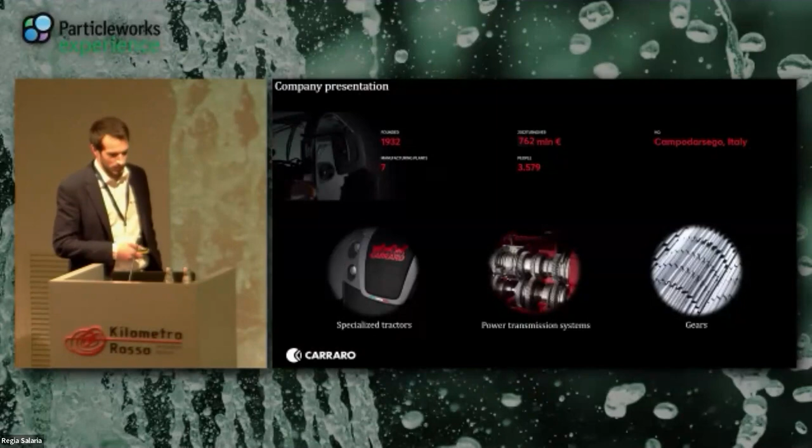First of all, introduction of the company. Carraro Group is a leader in production of specialized tractors, gears, as well as power transmission systems for agricultural and construction equipment applications, as well as automotive industries and material handling. The headquarters of the group is in Campodarsego, near Padua, and the group counts over 3,500 employees, across our manufacturing plants in Argentina, Italy, India, and China.

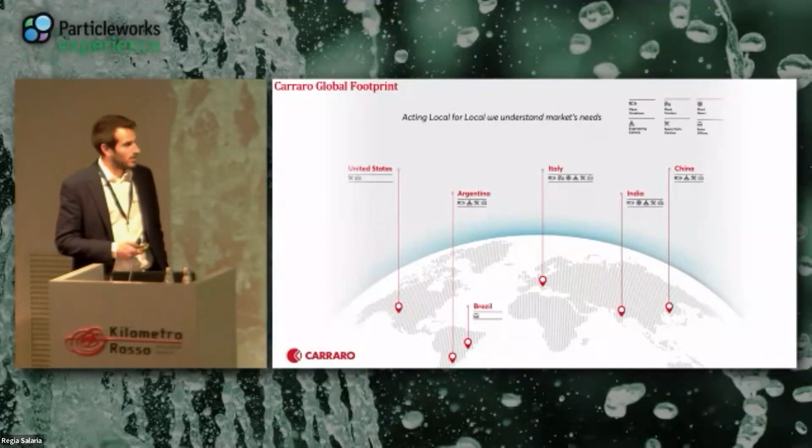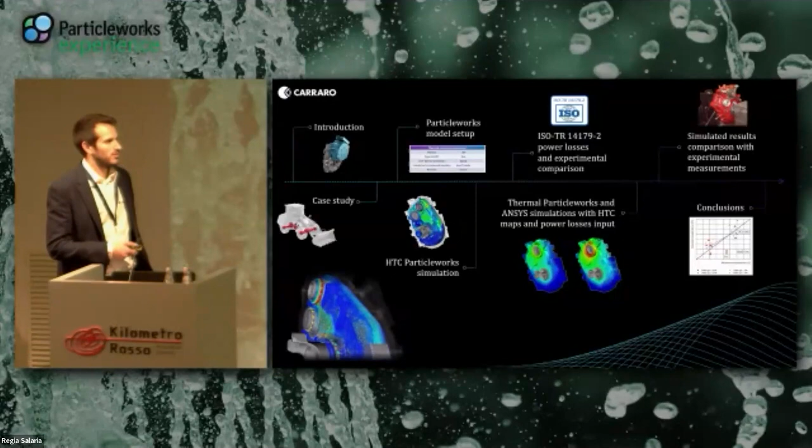After a brief introduction and an explanation of the case study, we will see the Particleworks model setup and simulation for estimating the heat transfer coefficient of the transfer box under investigation, and we will see the power losses formulation in accordance with the technical report of ISO 14179 part 2. And we will see how these two contributions have been used for the thermal steady state Particleworks and ANSYS workbench simulation. Finally, we will see a comparison of the results with the experimental measurements.

As we know, also in off-highway power transmission system field, electrification is becoming more and more a relevant topic because of the strengthening of emission regulations and the need for less fuel consumption. This leads to the typical use of high rotational speeds of the e-motors that causes an increase of power losses and temperatures. These two aspects have to be controlled, as temperatures can lead to possible overheating of the internal components, and power losses must be controlled in order to maximize the efficiency of the transmissions.

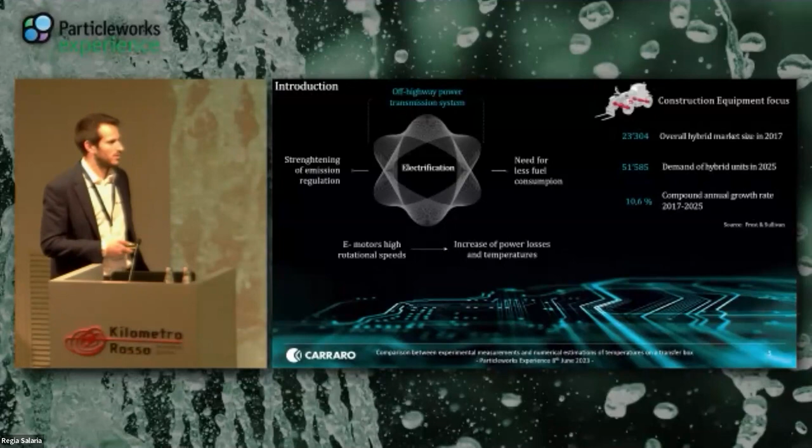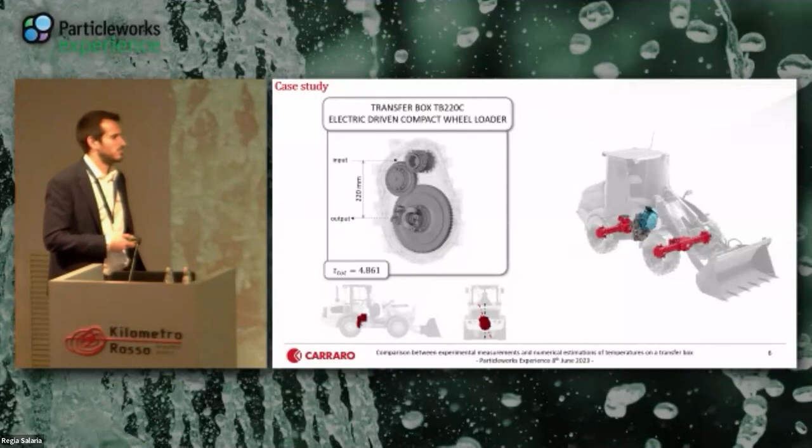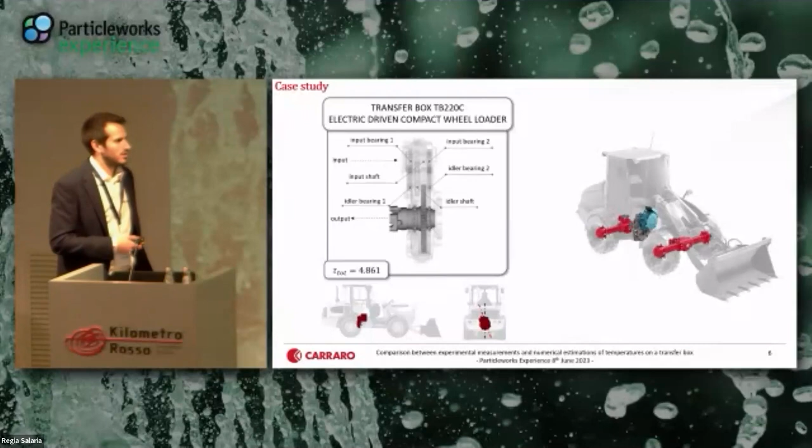The case study under investigation is a transfer box for an electric compact wheel loader. The total ratio of the transfer box is about 4.86, and it is characterized by an input-output axis, with an overall axis distance of 220 millimeters. The transfer box is composed of an input shaft, an idler shaft, and an output shaft, each of which is supported by two ball bearings.

The aim of the analysis is to investigate the influences of two different input speeds of the input shaft, as well as two different input rotational directions, clockwise and counterclockwise, in terms of overall HTC (heat transfer coefficient), as well as churning losses, and then temperatures.

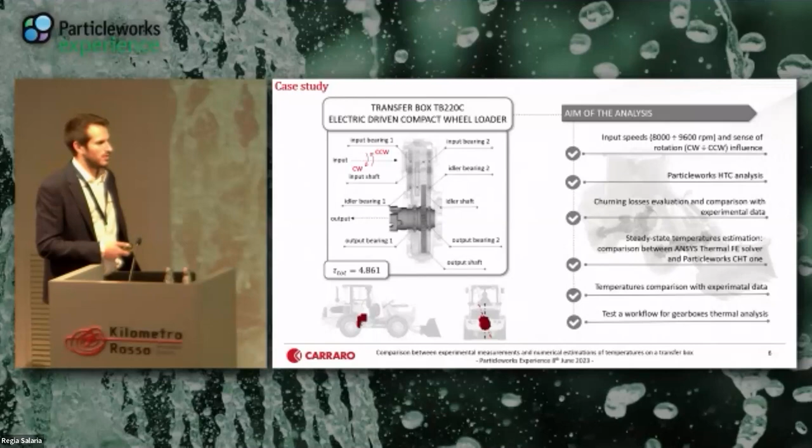Overall, the aim of this workflow is to validate this type of analysis for gearbox thermal analysis, and so the temperatures are being compared with the experimental results.

Regarding the model setup, we used 0.8 particle size, which leads to a total particle count higher than 2,300,000. The simulation for the HTC and conjugate heat transfer analysis has been performed on a workstation with a GPU NVIDIA RTX A5000.

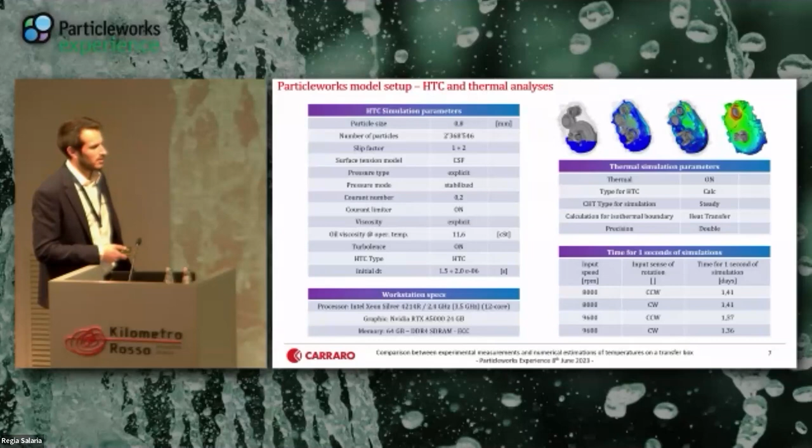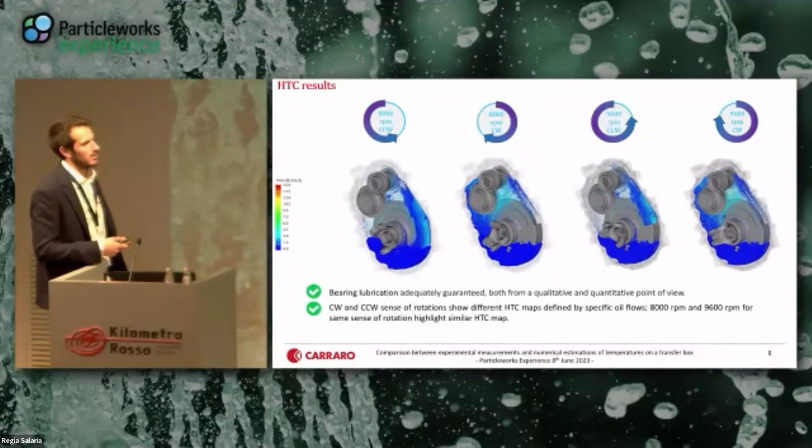The results of the heat transfer coefficient analysis show that, first of all, bearing lubrication is guaranteed in all conditions. Considering the same input speed of 8000 RPM at the input shaft, we can see that the different rotation directions, counterclockwise and clockwise, lead to a different distribution of oil inside the transmission, both for lower idler and for the higher idler. This oil distribution leads to an HTC map on the internal surfaces of the housing that is different for the counterclockwise and clockwise rotation cases.

This is for the frontal view of the transmission, and this for the rear view. The results are similar to the front view.

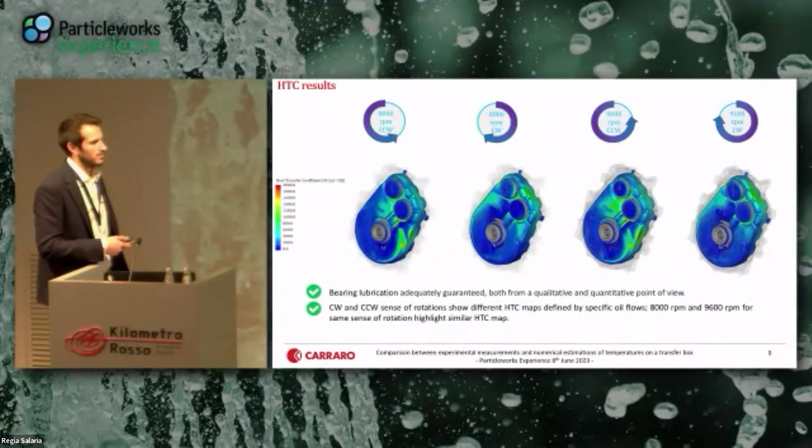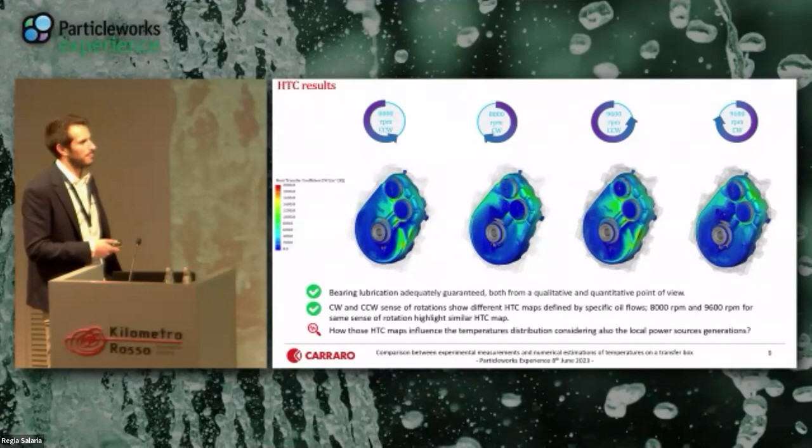Now the question is how those HTC maps influence the temperature on the gearbox, considering that we have different power source generation due to bearings, seals, and churning losses of the gears.

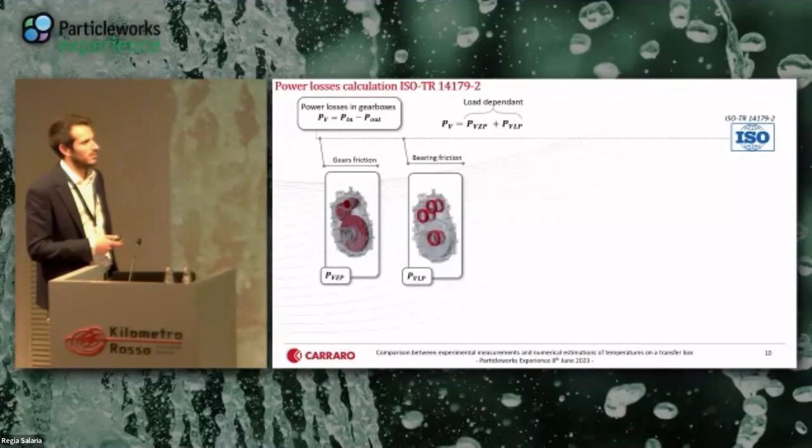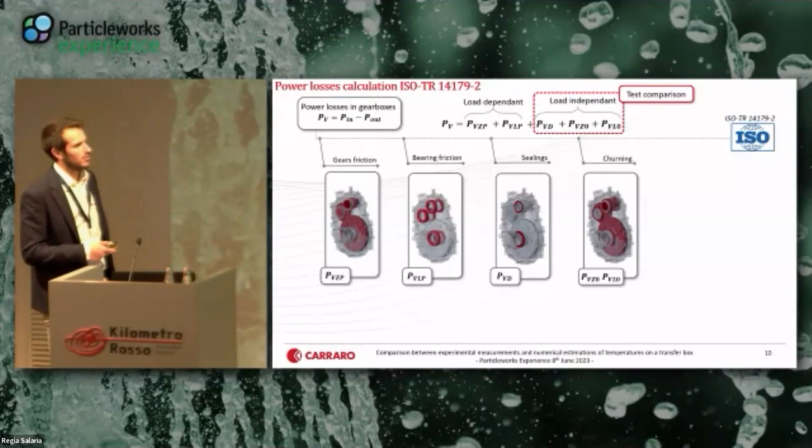We estimate the power sources, these power losses that serve as the power sources of the thermal analysis, according to the formulation provided by the technical report of ISO 14179 Part 2. Power losses are, in few words, the difference between the input and output powers, and are defined by different contributions. The first contribution is the friction of gears and the friction in bearings, and these two contributions are clearly load dependent. Then there is a contribution of sealings, and a contribution of the churning losses of both gears and bearings due to oil splashing, which are the contributions for the load independent conditions, and those contributions have been compared with the experimental test. And then there are other contributions.

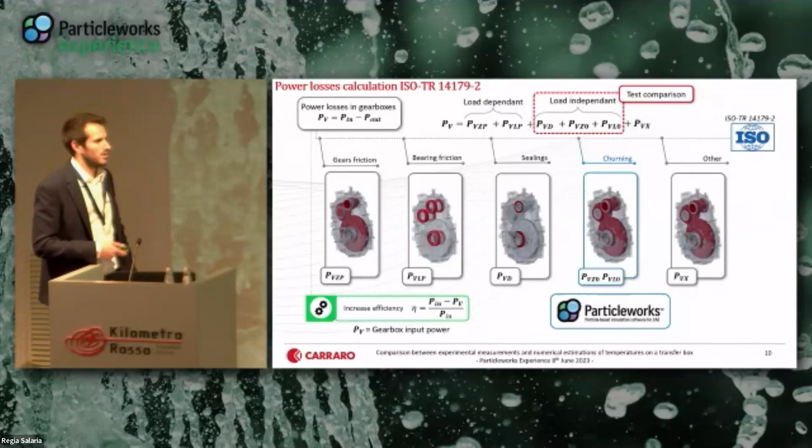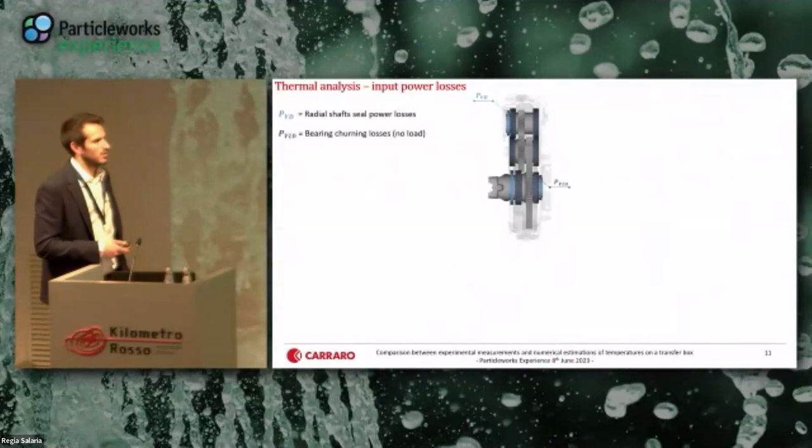We have to keep in mind that our aim is to minimize the power losses, and so increase as much as possible the overall efficiency of the transmission. With this goal, Particleworks can help by analyzing the churning losses on bearings and gears. For our application, we have 3 different shaft seal power losses at the input shaft, and 2 at the output shaft. We have the contribution of the bearing churning losses for the 6 bearings, and then we have the churning losses contribution for the gears.

It is worth noting that the technical report formulation does not take into account the different contributions, such as the sense of rotation of the gears, the presence of a carter or cover to protect the gear from oil splashing. It also does not take into account the contribute of the gears above the oil level, such as the idle and input gear, and for this reason it does not account for oil temperature.

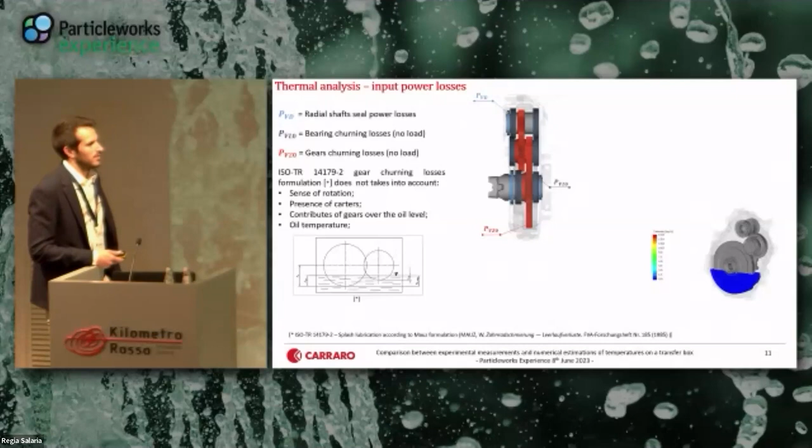And so we use the previous HTC simulations to estimate the churning losses, the overall churning losses of each case study.

And we see that, as we know, first of all, the presence of carter and screen has a great influence on the churning losses, because the output gear has the higher contribution to the overall churning losses, but is quite protected from the oil splashing.

Then we can see that the idle and input gear also contribute to the overall churning losses. For this fact, we use the different percentages of these churning losses to split the estimation given by the technical report to the different gears.

We also applied this power source not to the entire shaft, but only to the outer portion of the gears, as that is the portion of the gear in contact with oil.

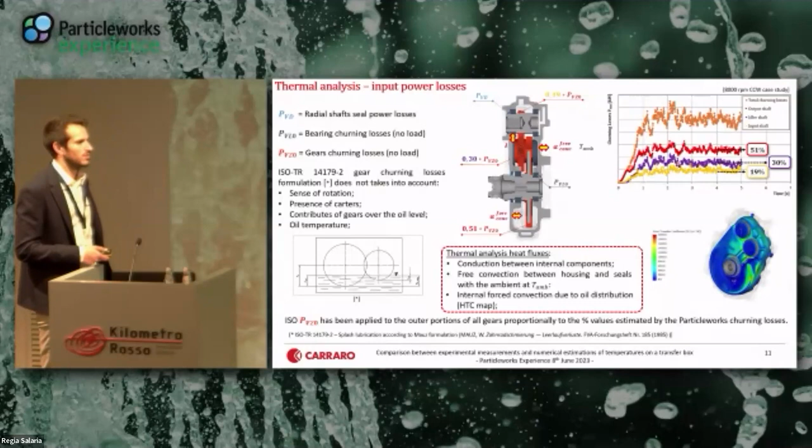The thermal analysis heat fluxes considered during the thermal simulation are the heat conduction between internal components, the free convection between the housing and the seals with the ambient, and the internal forced convection due to the oil distribution, which is the HTC map.

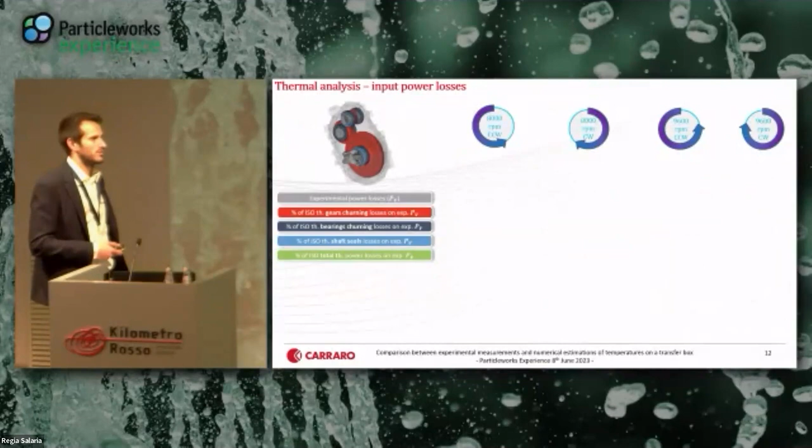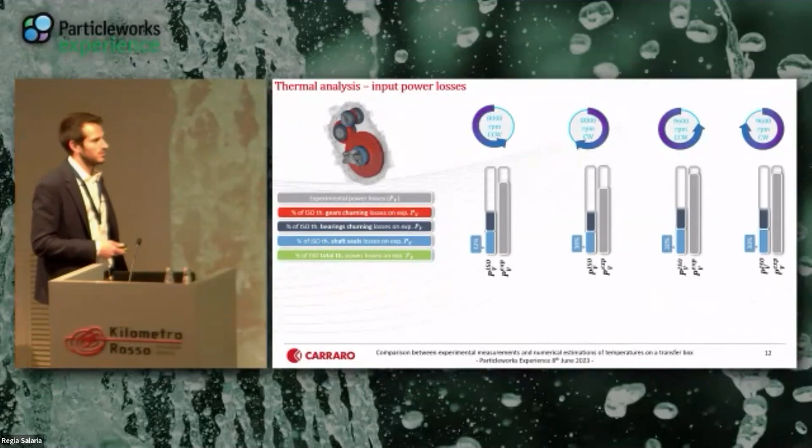Before going ahead, we compare the experimental power losses with the ISO theoretical power losses for the no-load case, and we saw that the different contributions lead to a certain gap with the experimental value.

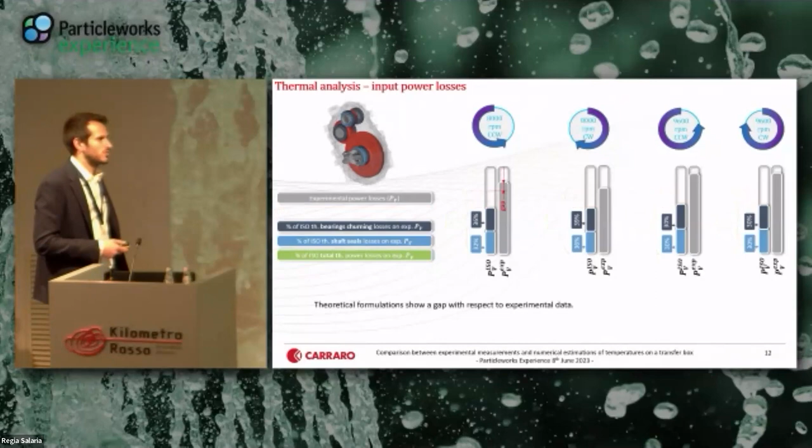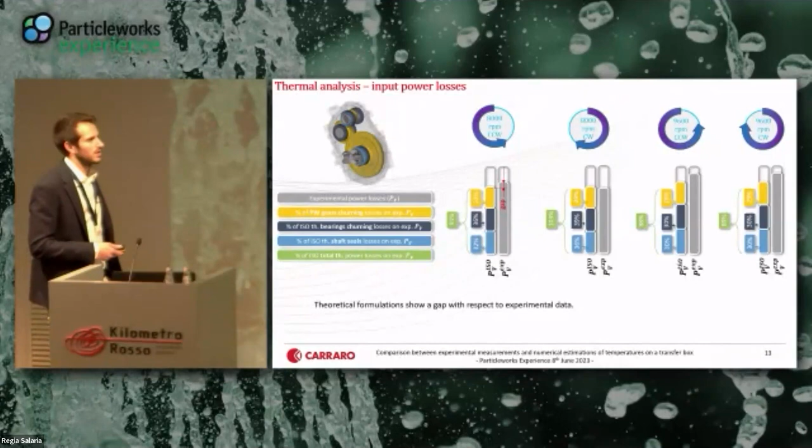We tried to substitute the churning losses calculated by ISO with the churning losses provided by Particleworks, and we see that this gap can be reduced for all cases.

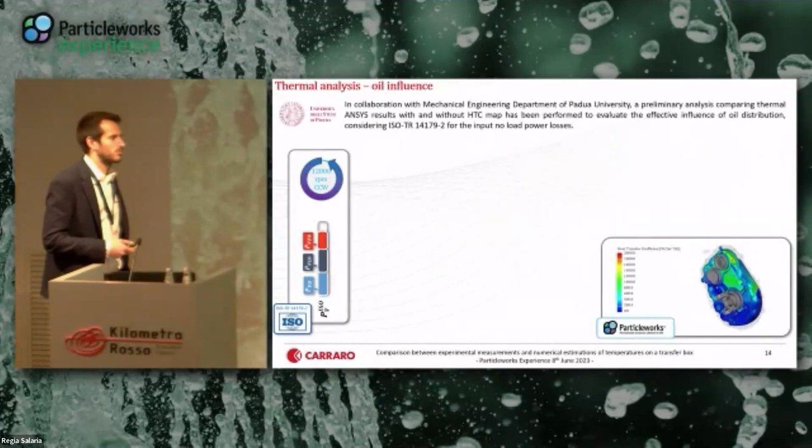For the thermal analysis, we proceed step by step. First of all, we start with a project in collaboration with the Mechanical Engineering Department of Padua University, analyzing two different simulations using ANSYS Workbench as a thermal FE solver.

In the first simulation, we consider only the power losses given by ISO for this case study. In the second simulation, we consider, in addition to these power losses, the HTC map given by Particleworks.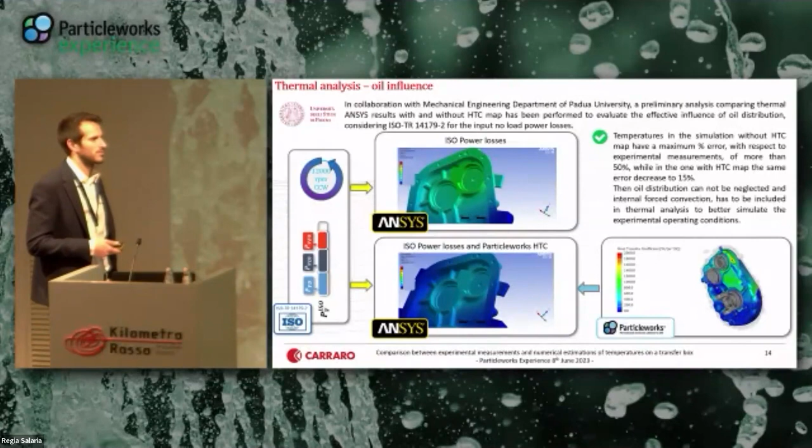We see that the percentage error given by the two simulations is quite different. In the case with the HTC map, we have a maximum error of 15%, with respect to the other case which was 50%. So we can say that the HTC map cannot be neglected in this kind of thermal analysis in order to better approximate the experimental values.

We see that with the thermal analysis, the CHT analysis in Particleworks, the temperature distribution inside the transmission is in accordance with the input power losses in bearings, the external portion of the gear, and the input seal, for example.

But the most important result is that the different HTC maps for the counterclockwise and clockwise input rotations at the same speed lead to two different temperature distributions. In particular, we see that the clockwise case study has a higher temperature than the counterclockwise simulation, in accordance with what we found in experimental tests.

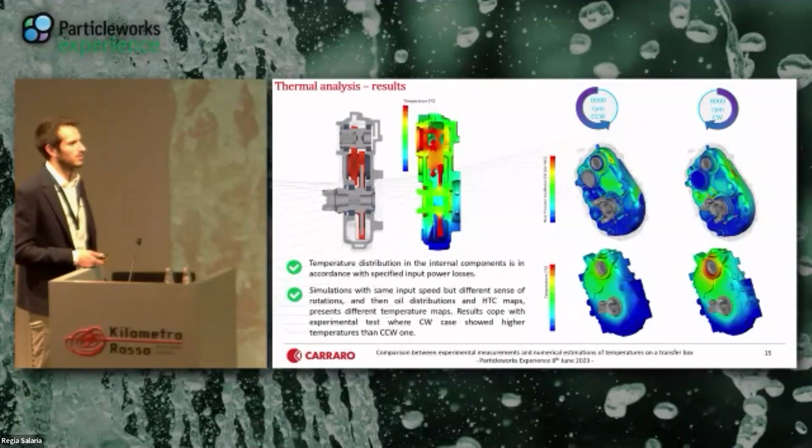The following step is to compare the Particleworks CHT solver with ANSYS Workbench for this specific case study, and compare the thermal outcomes with the experimental values acquired with thermocouples inside the gearbox during the validation test.

As we can see in this table, the different temperatures of the 6 bearings under investigation show the gap between the simulated temperature and the experimental one for the different bearings, in both simulations. We can see that the two simulations are in accordance.

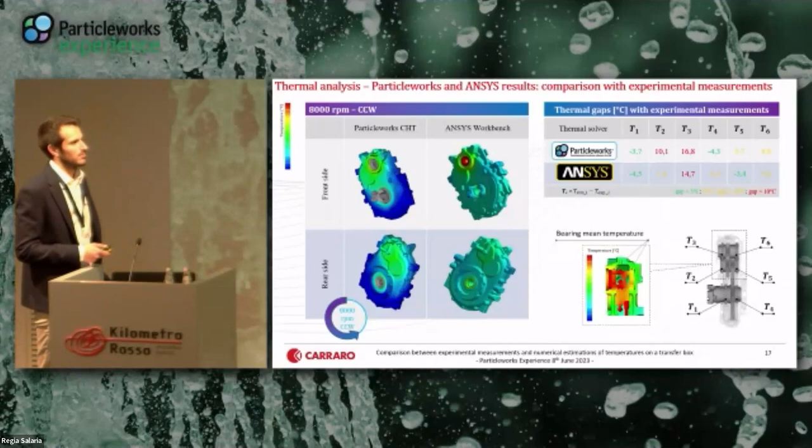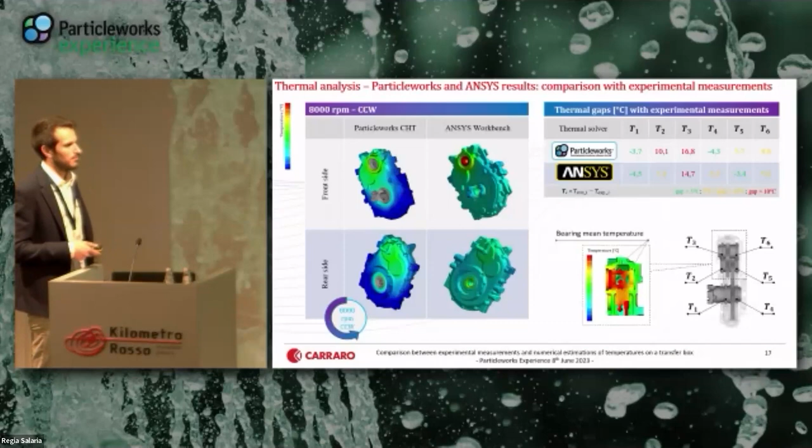We found a minimum gap of about 4 Celsius degrees and a maximum gap of 15 to 17 Celsius degrees. It's worth noting that this higher gap occurs at the input bearings near the input seal, which has a very high power loss input according to ISO formulations.

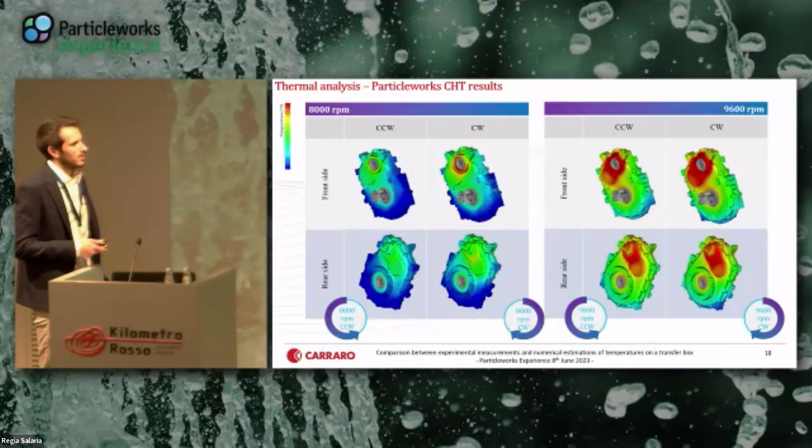Then a thermal steady state simulation was performed on all case studies, and as we said before, we see that also at higher RPM, this area shows higher temperature in the clockwise case study than in the same area of the counterclockwise case study, in accordance with the experimental data.

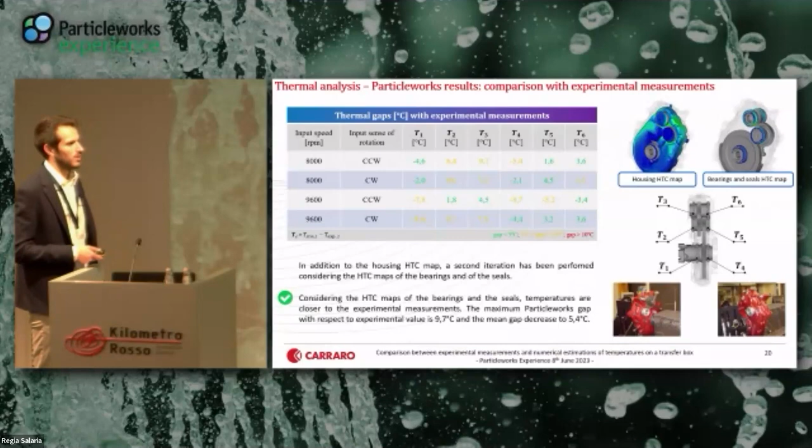For all these simulations, as we said before, only the HTC map of the housing was used. A second iteration was performed in Particleworks conjugate heat transfer analysis, considering also the bearings and seals HTC map. With these HTC maps added to the previous one, we see that all the gaps are reduced, and the maximum and mean gap have been reduced.

As a final slide, we took the previous temperature measurements and plotted them on this graph to evaluate the correlation between experimental and simulated values. Each point represents a bearing for each case study, defined on the x-axis by the measured experimental temperature and on the y-axis by the simulated temperature.

If those values are equal, all the points would lie on the solid line representing ideal correlation. In our case, we have this dotted line instead.

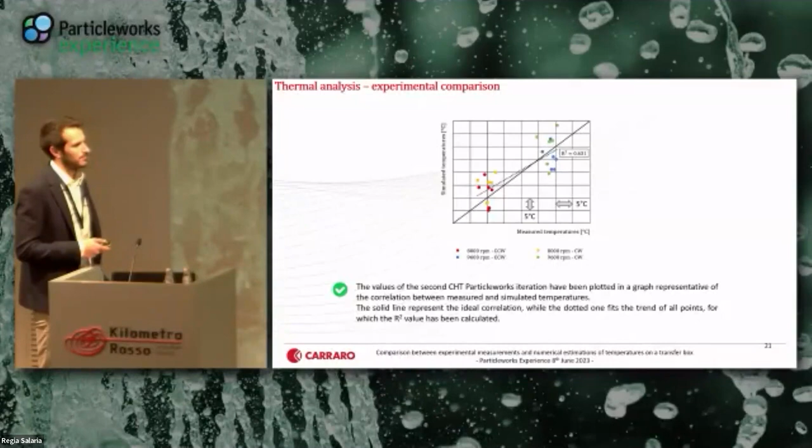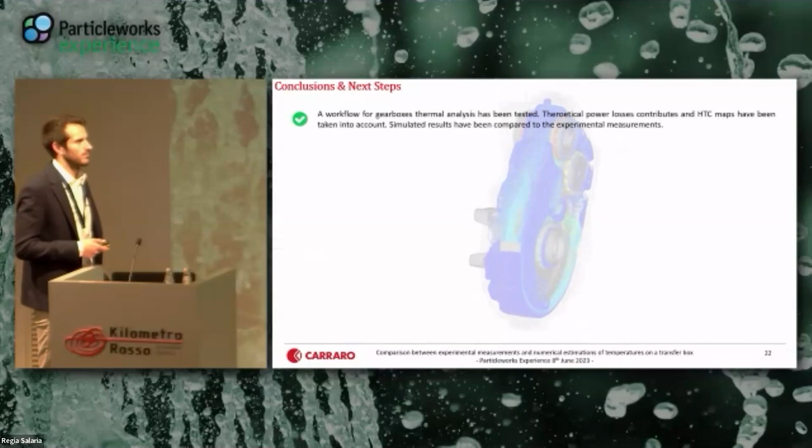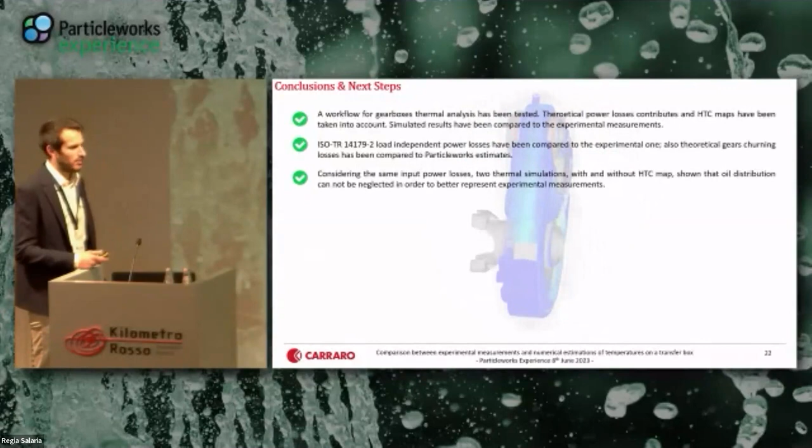In conclusion, we can say that the workflow for the thermal analysis of this kind of gearbox has been tested and validated. Theoretical power losses, in accordance with the technical report ISO 14179-2 load independent case, have been calculated and compared with experimental results, then used as input for thermal analysis, steady state analysis, both in the thermal FEA solver of ANSYS Workbench and the CHT solver of Particleworks.

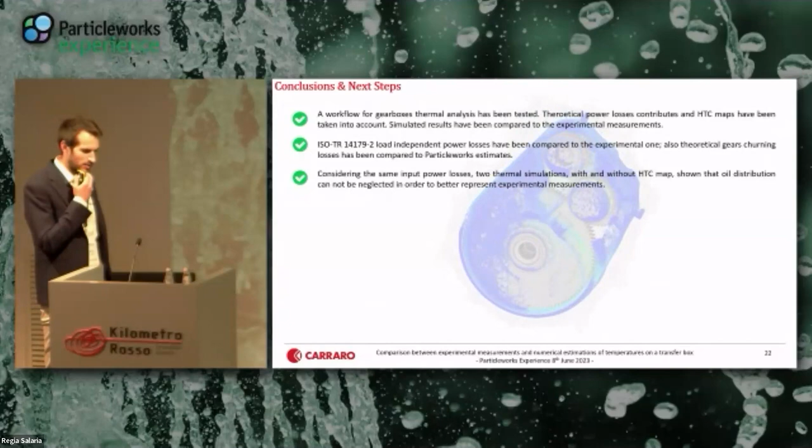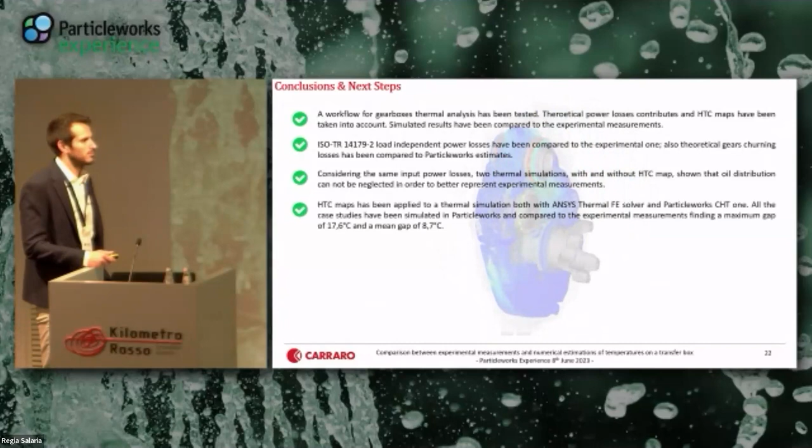We saw that HTC maps cannot be neglected in this kind of simulation in order to better represent the experimental measurements. We saw how, with the second iteration, the HTC map of bearings and seals, in addition to the HTC map of the wall housing, decreased the maximum and mean gap of the bearing temperature with respect to the experimental data.

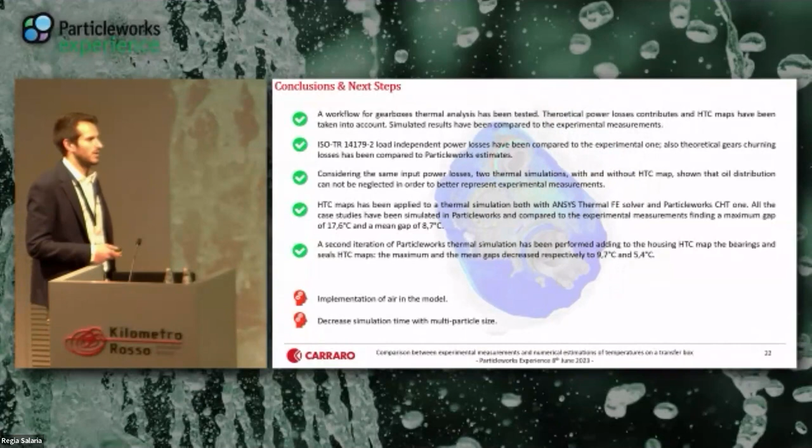Next steps could certainly include the implementation of the air inside the transmission in the HTC model, and decreasing the simulation time with a multi-particle size approach. Thank you.

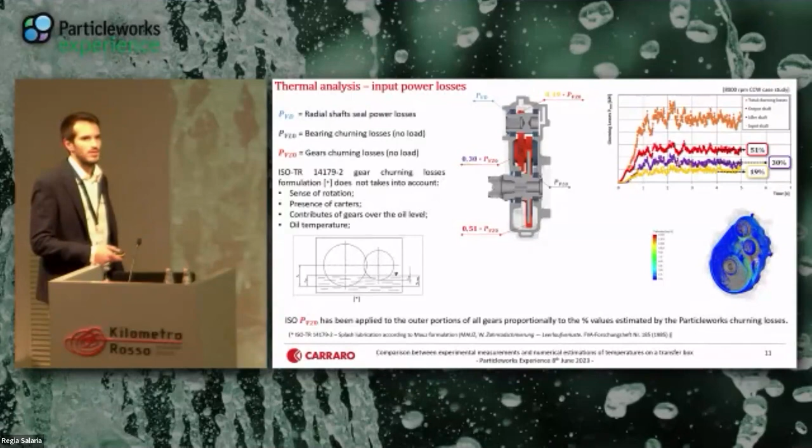So then in the CHT, it's input as a volumetric source to the whole wheel, right? Yeah, not to the whole gear, but only to the outer portion, as you can see here.

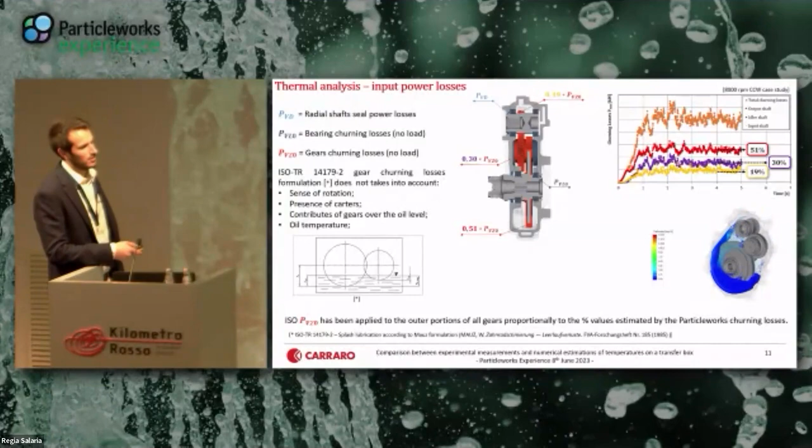So you modified the model to have some surface layer for each gear. Yeah, sure. Okay, perfect. Thank you. Thanks.